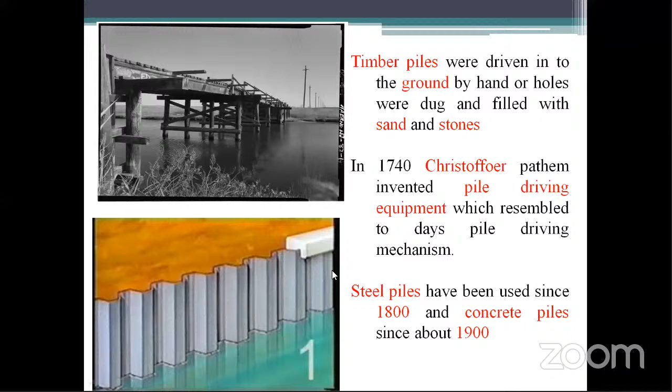In 1740 Christopher Polhem invented this pile driving equipment. It resembles pile driving mechanics, what we call a pile dynamic analyzer. This concept was already developed by Christopher in 1740, and it is like an advanced technique we are using now. And see, in 1800 steel piles were used for retaining water, and concrete piles have been introduced since 1900.

The industrial revolution brought about important changes to the pile driving system through the invention of steam and diesel. That's why you can see a lot of rotary machines. Initially they were using tripod machines. Now, with a lot of research, there are rig machines that enable you to complete projects in stipulated times. I will be showing the detailed specification methodology in the coming slide.

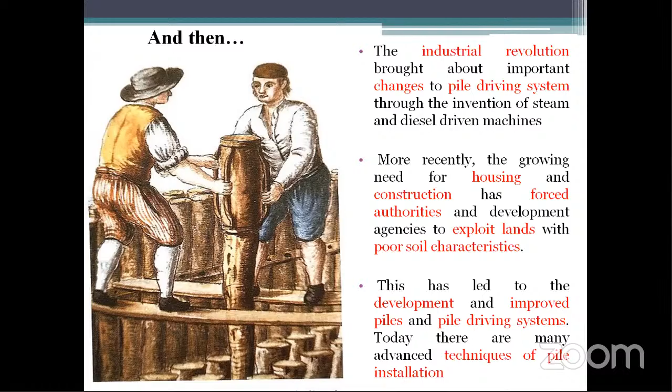See now, what do you mean by pile foundation? If you see a soil mechanics textbook or a structural textbook, they each have a different definition.

The standard definition is: a pile is a structural member made up of steel, concrete, or timber, and it is used to support the structure and transfer the load at the desired depth either by end bearing or skin friction.

You can see the pile shown in blue color. The skin friction resisted by the soil is shown in black, and this is the end bearing. This is an end bearing pile - the load from this residential building is resisted by the rock. If rock is not encountered, the entire load will be taken care of by the soil.

So if the soil is good, you can go for a shallow foundation. If the load is very high, then you have to go for a deep foundation.

Take the Bangalore Metro example - especially at Majestic, rock was encountered at just 15 meters. But when I was working in Lucknow Metro, even till 45 meters we didn't encounter rock. It was completely designed with skin friction. So the total capacity is always designed with skin friction plus end bearing.

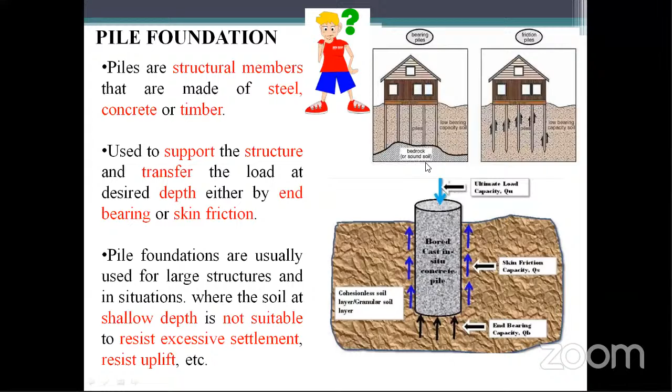When you come to larger diameter piles - especially for big infrastructure projects like metro - larger diameter piles are introduced. For a residential building, 600mm diameter is generally sufficient, or maximum 750mm. But for metro projects, we generally use 1.2 or 1.5 meters, depending on the case.

So in that case, as per IS 2911, the code won't satisfy. We still have a lot of uncertainties and research gaps - especially between whatever we teach in the classroom and whatever we implement in practice, there's a huge difference.

We must understand there is still a lack of knowledge about residual soil. People have not understood what is meant by IGM or bedrock. Just based on the N value, they are terminating the borehole.

But you're designing the pile for skin friction and end bearing. If you are deciding the borehole depth based only on N value without understanding the type of layer - and if you see any boreholes, especially in the current scenario in India, you won't see C and phi values properly documented. They may give an entire 30 meters depth with only one reading of C and phi. In that case, how will you design? So a lot of uncertainty is there.

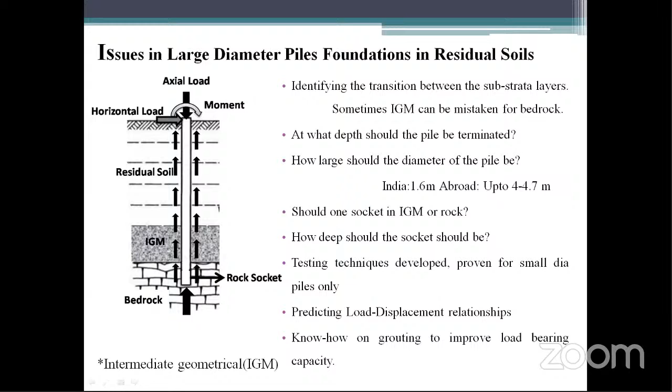Generally the flow chart for any metro project or foundation: first you do field testing based on soil classification. Based on the load, you decide whether to go for a shallow foundation or a deep foundation. Once you decide on deep foundation, currently we only do bored cast-in-situ piles, not precast. Once you decide on bored casting, you design for axial load as well as lateral load.

Once designed, you check this in the field also by the load settlement curve, then prepare the drawing and design, then the work starts. Whatever calculation was done in the office gets back-calculated when the pile is constructed in the field, by conducting a static pile load test or pile dynamic testing. Also by PIT you can check the concrete quantity and quality. Once everything is over, then you give the approval.

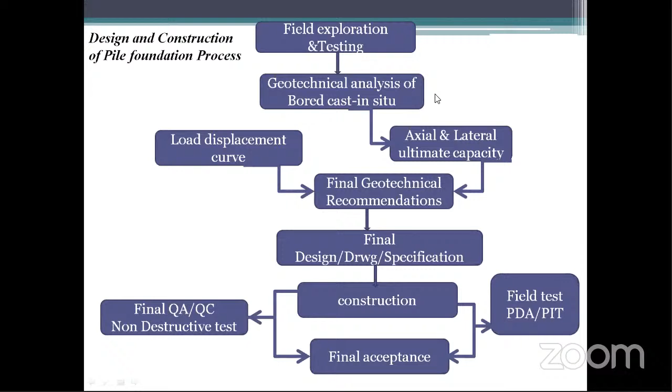Currently in India, 10 Indian cities have a functional metro railway system: Kolkata, Delhi, Chennai, Bangalore, Hyderabad, Jaipur, Gurgaon, Mumbai, Kochi, and Lucknow. This is the current status of metro projects ongoing.

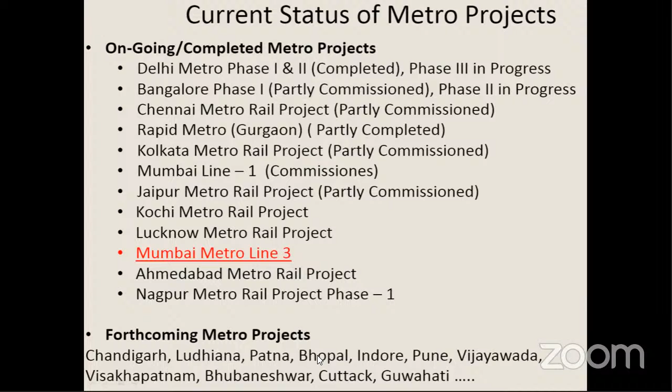The Delhi metro phase 1 and phase 2 are completed, phase 3 is in progress. Bangalore phase 1 is partially commissioned and phase 2 is in progress. Chennai is similar. The forthcoming projects are Chandigarh, Ludhiana, Patna, and Visakhapatnam. I have plotted this, available on Google, showing the upcoming and ongoing projects in India.

Now, to understand the stepwise process: first they conduct a soil investigation, then decide on a pile foundation. After constructing a pile, they do a pile cap, then go for a pedestal, then after the pedestal, a pier.

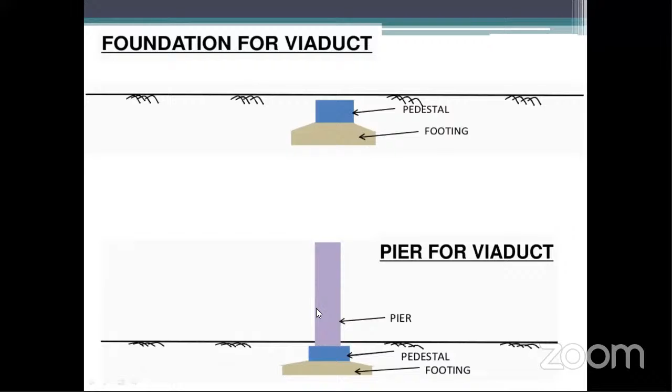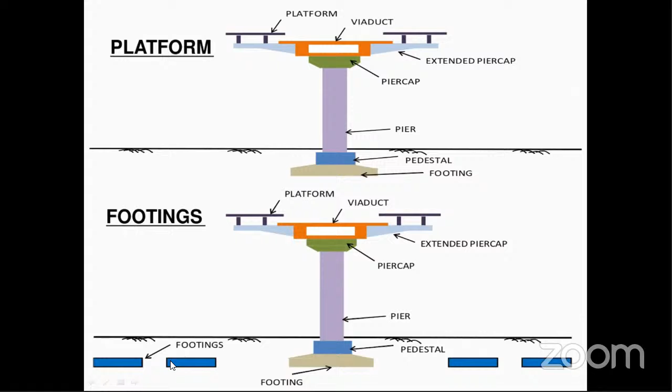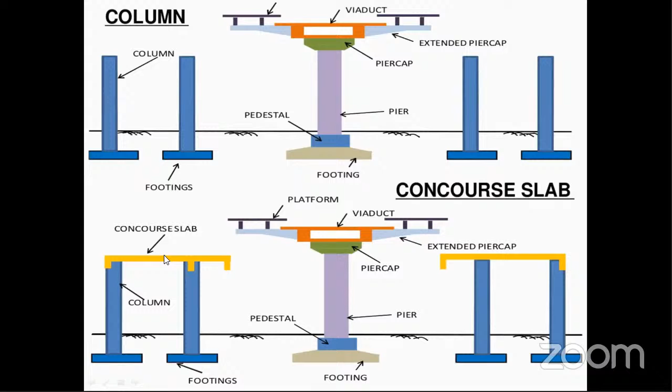After the pier, they construct a pier cap, then the viaduct, then the platform. This includes the extended pier caps, and also supporting footings for columns. Now they construct the station shed, then the concourse slab, then the platform. I told you this is the steel structure, then they cover it with a roof sheet. This is the step-by-step procedure.

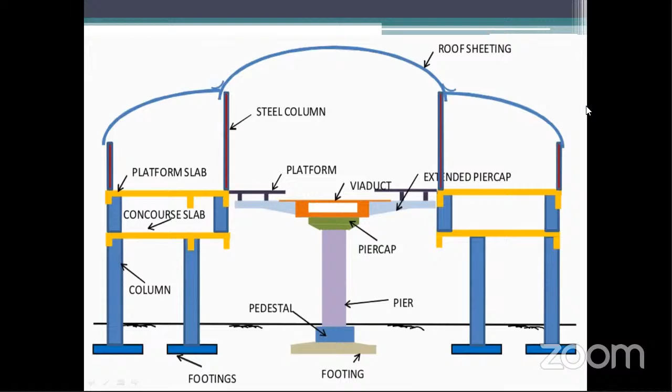Coming to current practice, we generally follow IS 2911 part 1 section 2 for concrete piles and bored cast-in-situ piles, and IS 2911 part 4 for pile load test only. In the Indian scenario we use smaller diameters, maximum 1.6 meters, whereas abroad they use up to 4.7 meters, because we are not financially as strong, so we always use the maximum feasible.

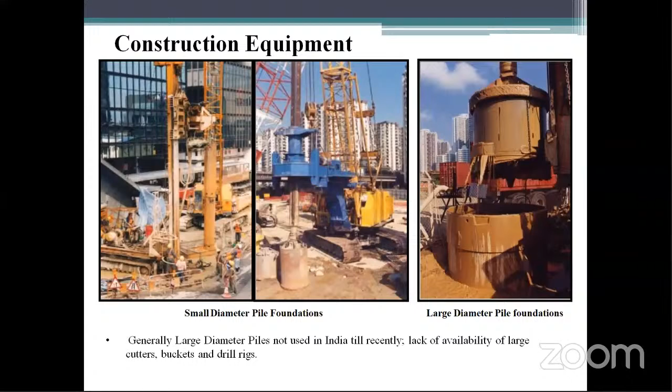With respect to 2010 onwards, we are using bigger equipment like rotary rigs and casing. Initially it was very difficult, always hiring equipment, and construction was difficult. Larger diameters were not used in India until recently because of lack of availability of large cutters, buckets, and drills. In the next slide you will understand different types of cutters, what type of soil each is used for, and their capacity. You can see this is the round shank chisel core barrel.

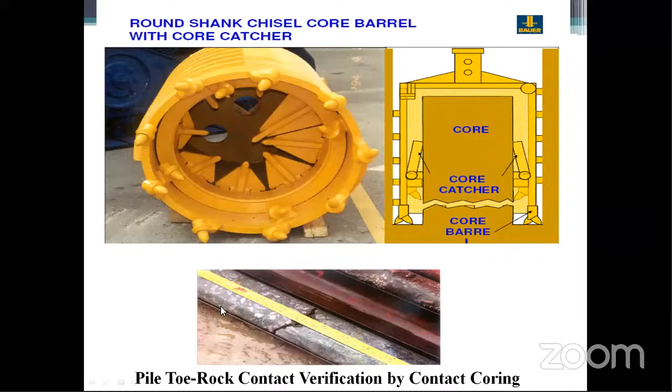This will be used to collect the rock sample. When we are designing the end bearing, this will play a major role. The rock will be cutting, so you can see the teeth. This is the rock sample. This is the core sample.

First, you will be forming a rock socket by cutting the annulus in the rock. First you identify, then you cut, then you break this, then you clean with the bucket, then again you put the air pump to remove the particles. Even a small particle, if it is there, then you can't achieve the end bearing what you are expecting.

So the cleaning of the borewell will always play a major role in pile work. After cleaning, you will be lowering the reinforcement, then you are pouring the concrete by the tremie method.

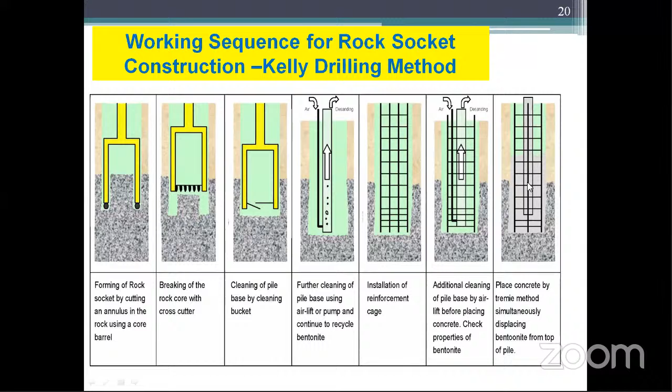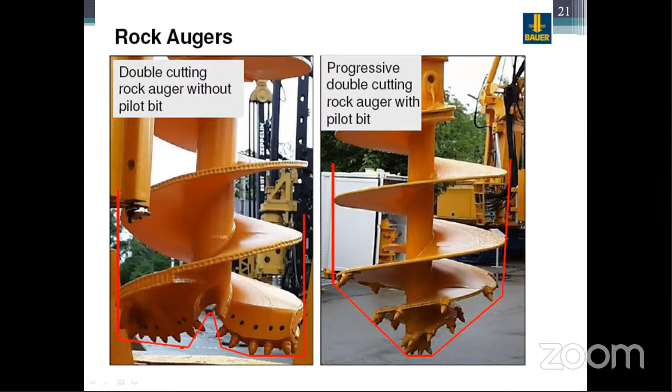You can't recommend as it is. You must have some basic knowledge. Then only your project will be completed successfully in short time.

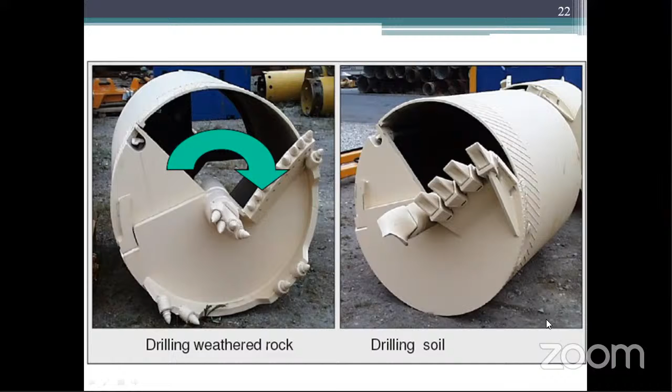Suppose, for example, you may be doing the soil testing for 3,000 or 4,000, but when you encounter rock, it will be 10,000, because hiring this type of drill bit and conducting it is very challenging. So the cost is also very high.

This is one more type, called round shank chisel core barrel. Its capacity, this will be used for weathered rock up to 80 MPa.

This is a roller bit core barrel, and this will be used for hard rock. That's why I told you geotechnical engineer and geology will play a major role in identification of rock, and based on that you will be suggesting the suitable augers. That is also the first step. Without knowing the knowledge of soil or rock, you can't randomly suggest anything.

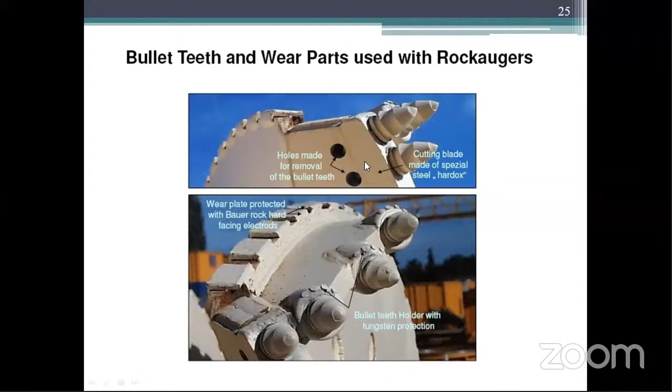So then there is one more, the bullet teeth and wear parts. You can see this, you can remove this and you can do the servicing. You can change this drill bit whenever you require.

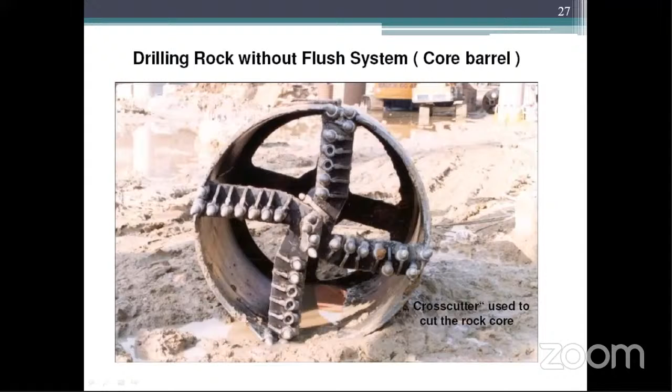This is a single blade cut auger, and this is a drilling auger without flush, with core barrel. This will be used for the rock core. Till now what you understood is for rock only, how to do this related to end bearing.

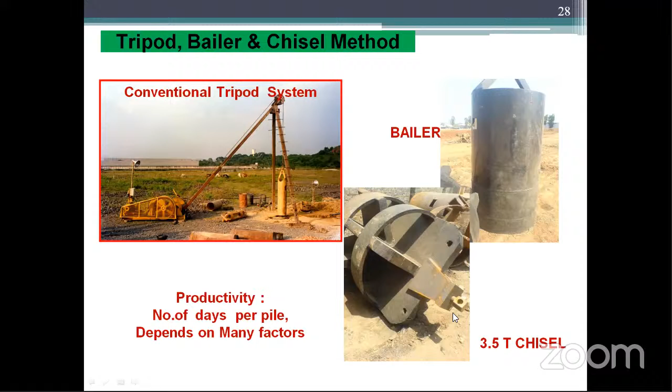Now you will be understanding if you want to construct the pile by the tremmy method. This is called the tripod method. First, you will be erecting this tripod, marking this. This is the chisel of 3.5 tons. This is the bailer for cleaning the borehole.

First, different steps. First, when you mark this, you will chisel it. Then the reinforcement will be constructed, then you are lowering this reinforcement. After lowering this reinforcement, by using the tremmy method you are constructing, you are pouring the concrete.

If the pile is successful, then the overflow of concrete will happen. Suppose if the pile's borehole has collapsed, then this type of overflow won't happen. This is also one of the rule of thumb. You will identify whether your pile is really constructed well.

Suppose if you constructed a 6-meter pile and you are estimating the concrete quantity, that much quantity of concrete should take place, and also the overflow should happen if the borehole is not collapsed. Suppose if the borehole is collapsed internally, when you are boring it may look good, but when you are lowering or when you are doing concreting, sometimes the borehole will collapse.

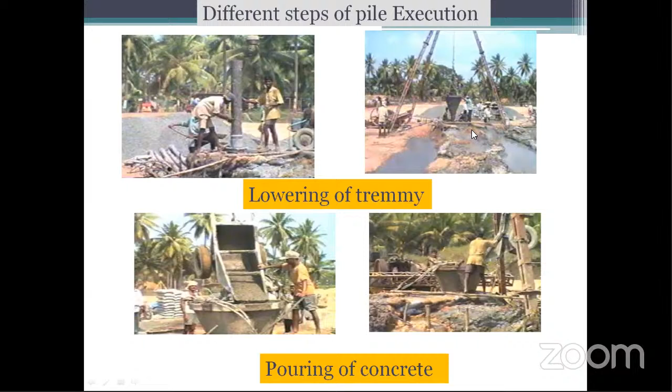So you should take care. You should not wait till 28 days after curing. So this is also a rule of thumb. Nowhere in the textbook will it tell you this. This all comes from practical experience.

After doing that, you will be chipping that pile and you will be conducting the pile load test by this. This is the hydraulic gauge.

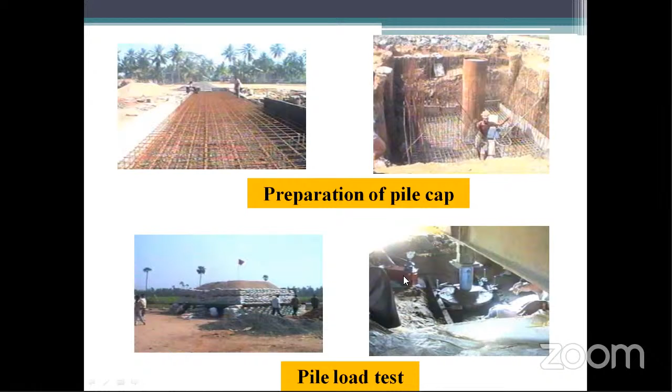You are putting the dial gauges. This is the pump. You're transferring the load and you will be calculating. When you are going for a manual method like a tripod, what are the limitations? It's very slow and sometimes it is indefinite.

And always you should have an experienced person. A fresher can't handle it. That's why in any project they will mention this many years of experience should be there. Lots of uncertainties will be there, and at every 1.5 meter you have to collect the sample and you should understand it. Based on that, you have to take the decision immediately and go to the next level by drilling. So a fresher can't do this. You need a lot of experience.

Next, very high quality supervision is required. Always at the back end, not only the site engineer, even a geotechnical person should be there. He should always verify whether the type of soil or rock we are expecting is what we got or not. Otherwise, we can't terminate the borehole. And the actual rock in which the pile socket is assessed by an indirect method, by energy. Even by tripod, just dropping the hammer based on the sound, you can't predict exactly.

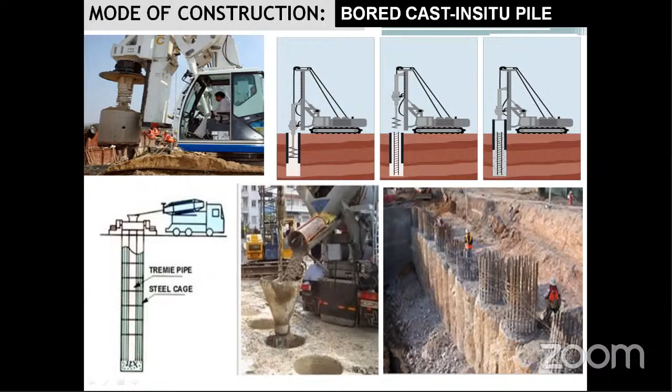So a lot of uncertainties are there, but here the cost is high. Initially it was not used, but nowadays this machine is used in every project, even residential, but the cost is high. Work-wise it is very accurate compared to the tripod method. Initially they drill, and if the soil is collapsing, they put a casing, then they lower the reinforcement, then they clean, then they do the tremie method. After curing they will be chipping. It will look like that. If you want, you can put the capping beam also. Then they will conduct the pile load test.

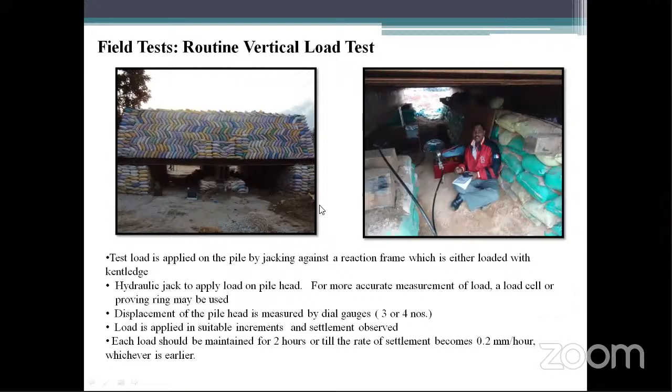The pile load test will be conducted by a hydraulic jack. They apply the load at equal intervals, and the settlement will be measured by the dial gauge. See, the load settlement, just roughly I'm showing you. This is the load settlement curve. It will always come like this. Once you get the load settlement curve, you have various methods to calculate: single tangent method, 12 mm, double tangent method, and 10% of dia.

IS 2911 Part 4 always says you should match the two criteria, that is 12 mm and 10% of dia. Suppose this is a 1 meter dia pile used for a metro foundation. 10% of dia will be 100 mm. Generating 100 mm settlement is impossible. And also getting 12 mm is very, very difficult. You require a huge load.

That's why I told you this concept is very good for smaller diameters, but not for larger diameters. So this is one way: whatever you design using the IS code method or the Meyerhof method, you can back calculate from the practical results. This is the curve obtained from the field. You can verify it by these four methods.

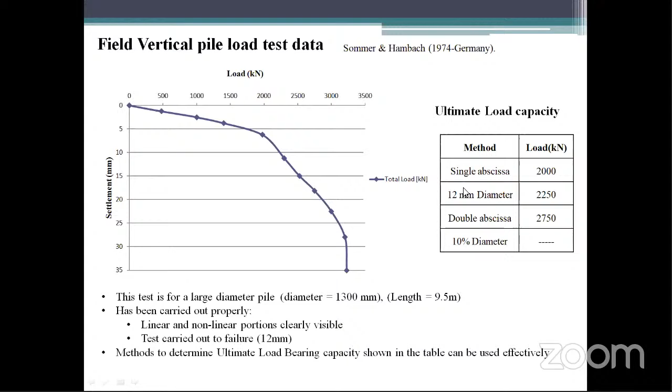And also in case you are not getting a proper static curve or some other thing. Nowadays very few people are using the static pile load test because of the preparation of sandbags. It will take a long time, so they go for an immediate test called a dynamic load test. In that, there is an advantage: from the dynamic test you can also obtain the static load test. So this is the thing.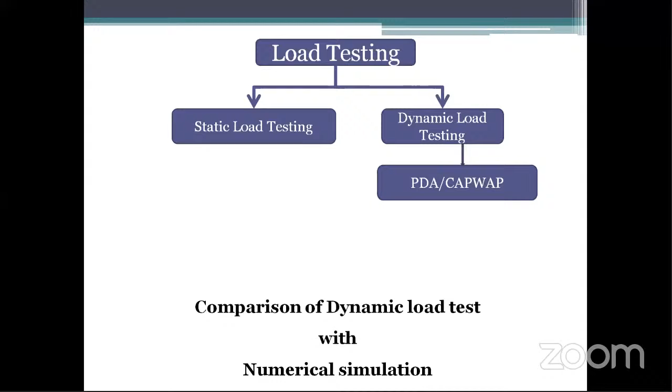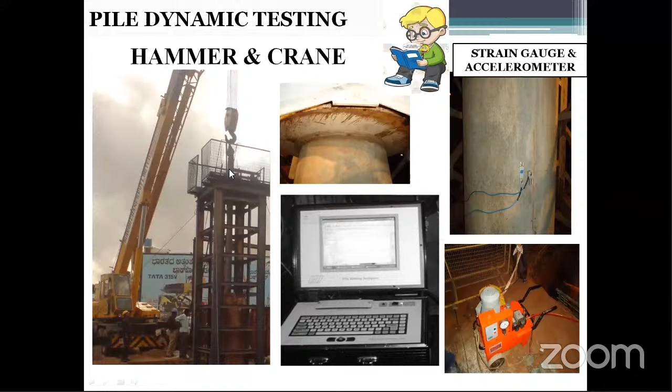They are just fixing this hammer. This is the cushion head. They are making a temporary head on the pile. Then they will put the cushions. Then they install the sensors, strain gauge and accelerometer. This is the PDA equipment. This is the pressure gauge. They will drop the hammer 3 times and they will calculate from that.

See what happens in the mechanism. Because in India we don't have a dynamic code, we always follow ASTM D4945 only. When the hammer hits the pile, what will happen? The compression wave will travel from top to bottom. The force and particle velocity will be measured, force from the strain signals using the pile area as well as modulus.

Then the velocity is calculated by integrating the measured acceleration. Then the force and velocity time history is captured by this PDA equipment. That's why you can see these waves, how they are. This is captured by the PDA equipment. Once you capture it, you will get a static curve like this.

See, the advantage of this test is this. The static test takes a long time; creating a platform will take a minimum of 1 week to 10 days. This will be very spontaneous. Another benefit is you will be calculating the capacity of the pile, and additionally pile integrity, pile stress and hammer performance. These 3 will tell whether the pile is defective. If you have any problem like honeycombing, it can be easily verified. But in a static pile load test, you can't do all this.

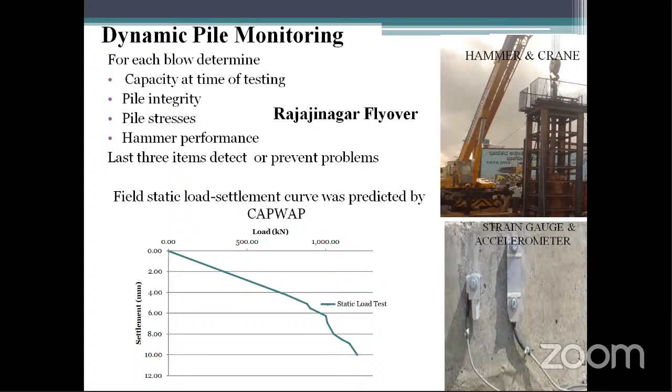So nowadays everyone is going for the dynamic test, because in one test you get all the results. And if you are a researcher with good software knowledge, you can model this using CAPWAP and back calculate the total skin friction, end bearing as well as the total curve. That will give you more confidence as a designer.

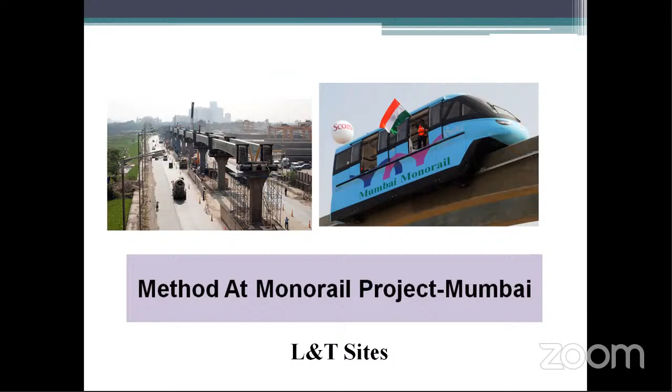Now I will go a little fast through the metro rail, the general procedure to follow. I have taken a case study of L&T's Mumbai Monorail. They have taken 2 pile diameters, 1000 mm and 800 mm. When they designed, they got a maximum capacity of 300 to 550 tons, and as per their bore log, they encountered rock like basalt, with UCS of about 45 to 200 MPa.

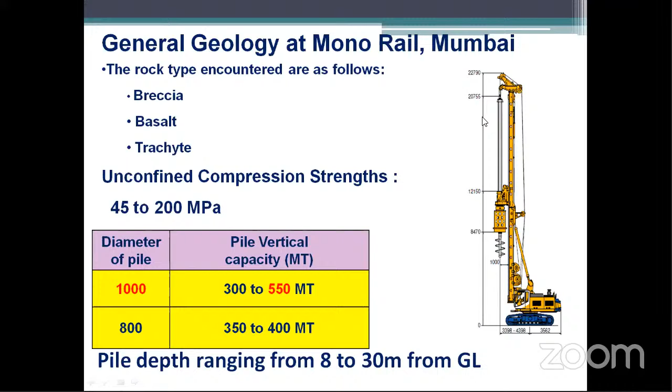And the pile depth, as I told you, the soil is undulating, it won't be uniform. It may be from 8 meters, and in some places the maximum depth they went was 30 meters. In Bangalore we encountered rock at 15 meters, but in Lucknow, even at 30, 45, 50 meters, no rock. So this will depend.

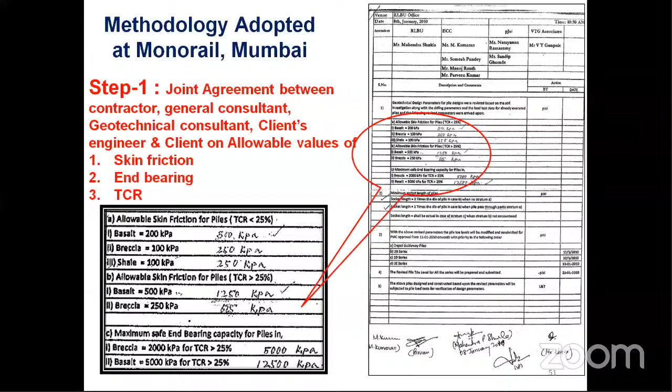Generally in metro there will always be a joint agreement between the contractor, consultant, geotechnical consultant and client on the allowable values. They will give instructions on skin friction, end bearing and total core recovery, and it should be well documented. Then they collect samples at regular intervals and send them for testing. You can see how nicely they have maintained the date, pile, depth, timings, everything.

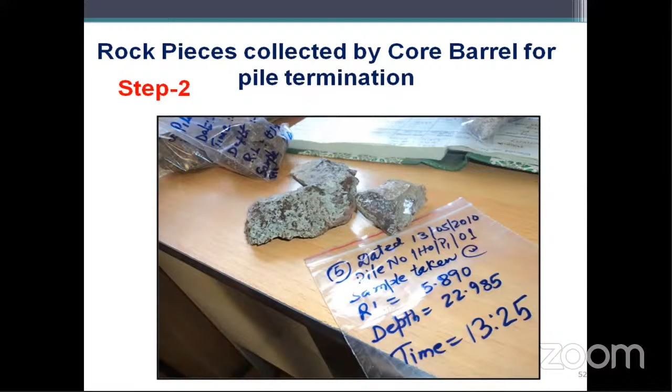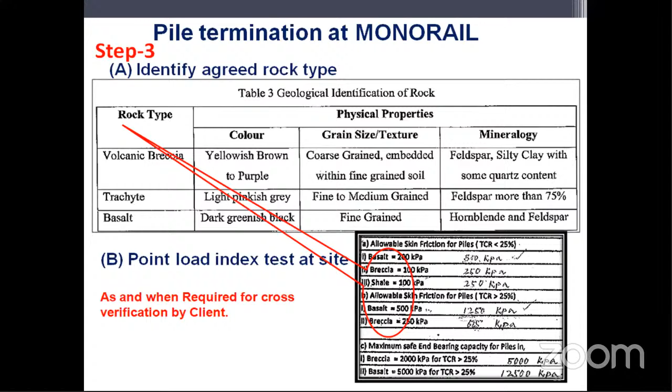That's why when you are noting down, you must have at least basic knowledge of soil as well as rock. After reaching rock, you should make sure of the diameter. This is the core barrel for core sampling. With a suitable auger, you cut the sample and collect it, and the core sample is taken by the rotary piling rig. When terminating the pile in rock, you must have good knowledge, and it should be verified by a point load test.

Then based on rock type and total core recovery, you calculate the skin friction and end bearing by a suitable formula, and you take a factor of safety. Generally in metro or deep foundations, we never go for 2. We always take more than 2: 2.2, 2.5 or 3.

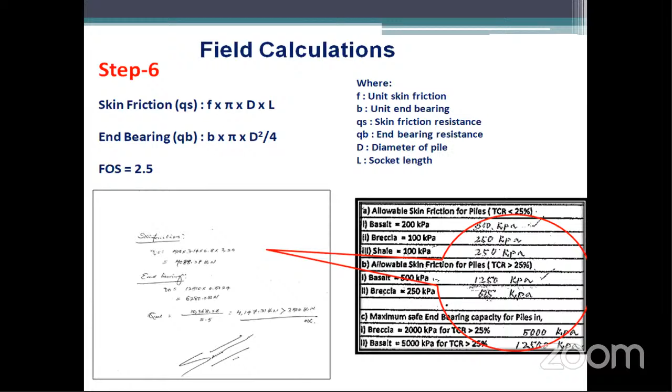Then this calculation will be sent to the client. Once the client is satisfied, he will give the approval. Then you have to terminate the pile. This is the procedure followed in the metro.

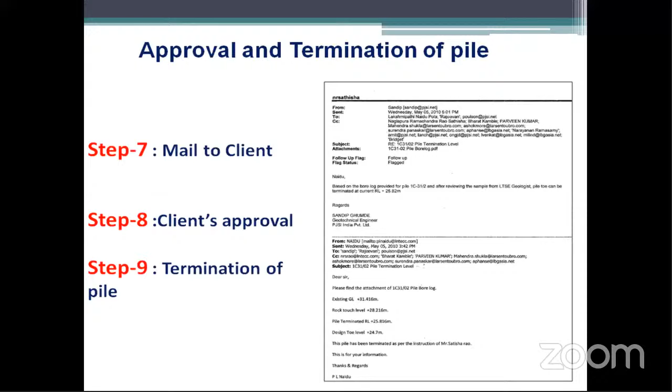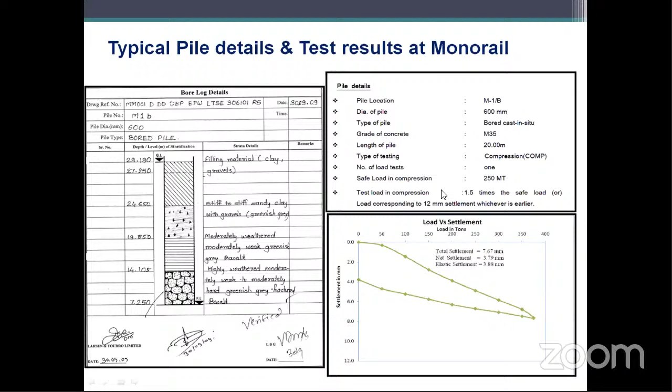Now I will be telling you about the underground section. This is phase 2 of Delhi. The contract value is about 813.5 crores. In that they have constructed 4 underground stations plus tunnel. This is also a joint venture by DMRC, Delhi Metro, and CEC.

CEC is sharing a 70% share, and Soma, a 70-30 combination. Always this metro will be done with this joint venture only. The mobilization period they have given is 12 weeks. The construction period was 162 weeks, and the defect liability is 12 months. And the internal retention recovery to keep is 10%.

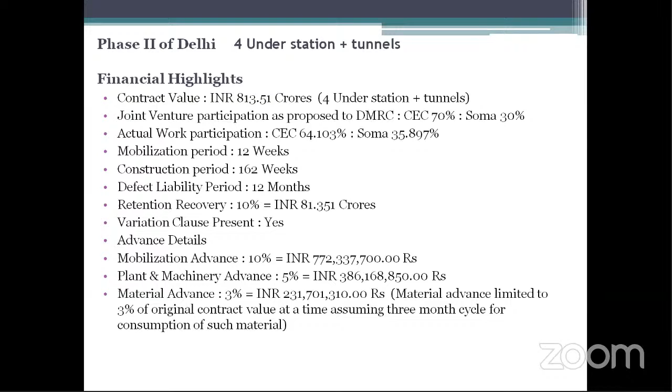See, they have constructed these 4 metro stations: Jorbagh station, INA station, Racecourse and AIIMS station. The length is about 318, the width is about 20 meters, and the depth is about 18 meters. The length will be the same here, but here the depth is a little bit less.

See, when you are suggesting underground metro, the advantages are that the underground metro electrification system has fewer components, and also the operation and maintenance cost of underground metro is very less compared to elevated, because it is unaffected by external weather conditions, because it is always below ground, so you don't need much maintenance.

But the initial cost is too high in underground compared to elevated. That is the only drawback. Also, relief from traffic congestion can be achieved due to underground metro. The architectural quality and aesthetic view of a particular city can be maintained by the underground metro.

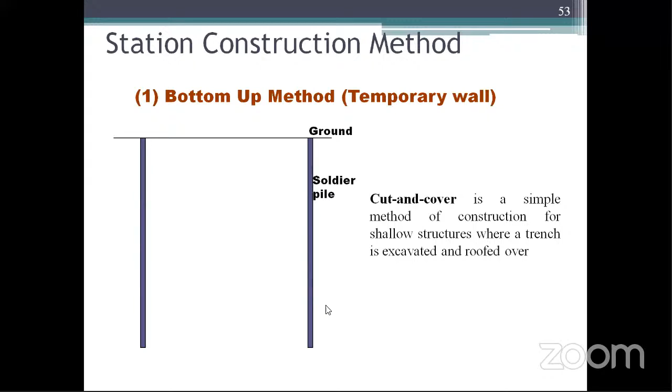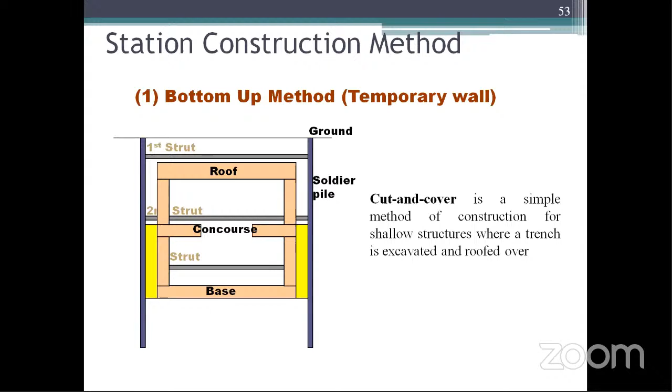See, when you are constructing, there are 2 types: top-down construction or bottom-up construction. First we will be constructing bottom-up. You will be going to the required depth. First you will be retaining the soil by soldier piles till the required depth. Then you will be constructing strut 1, then strut 2, then strut 3. Then you will be constructing the base, then the concourse, then the roof slab.

See, this is the construction procedure of the soldier pile. First you will be marking the location. You will be doing the borehole by the rotary rig method, and if soil is collapsing, you will always put the casing at maybe 1 meter to 3 meters, and drilling will be continued. Suppose you want to drill to 12 meters, you have to do 12 meters as per the designer. Once the design depth is reached, clean the borehole using the cleaning bucket.

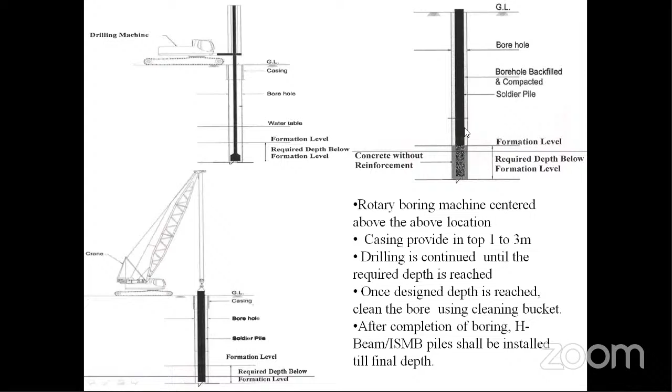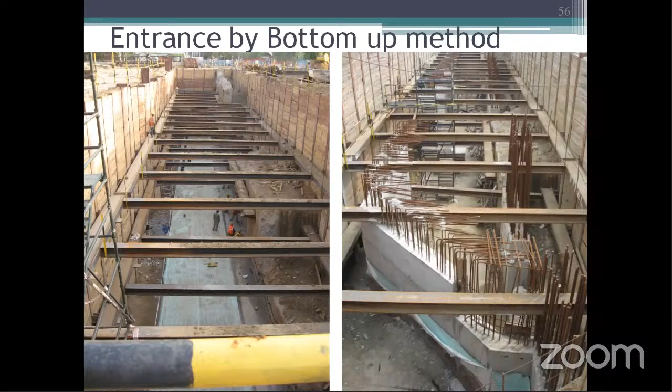After completion of the boring, the H-beam or ISMB shall be installed. After your work, you can remove this. See, this is the soldier pile and this is the strut. You can see this is the entrance by the bottom-up method. Similar work we have done at Chinnaswamy Stadium in Bangalore Metro also. This is in Delhi Metro.

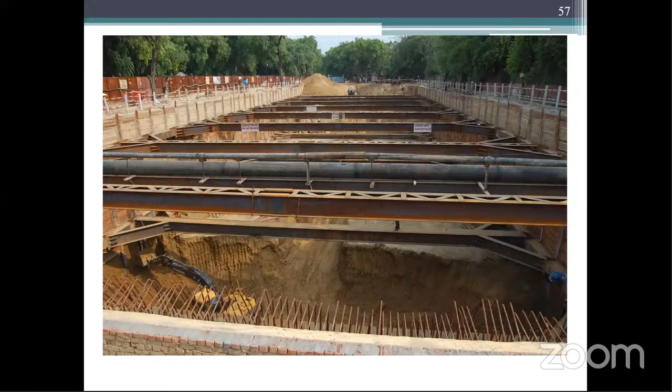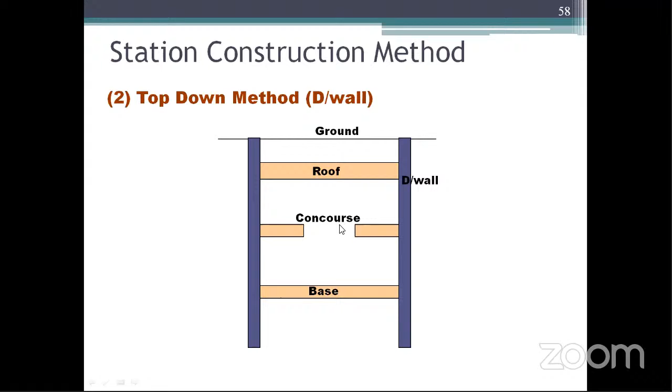Next is top-down construction. See, this is a top-down construction. First, in top-down construction, we always construct the retaining by diaphragm wall only. Once the diaphragm wall is constructed, you will be excavating, then you will be putting the roof. Then again, your equipment will go. You are putting the slab. Then again, you will make a concourse slab. Then again, you are making your closing base here.

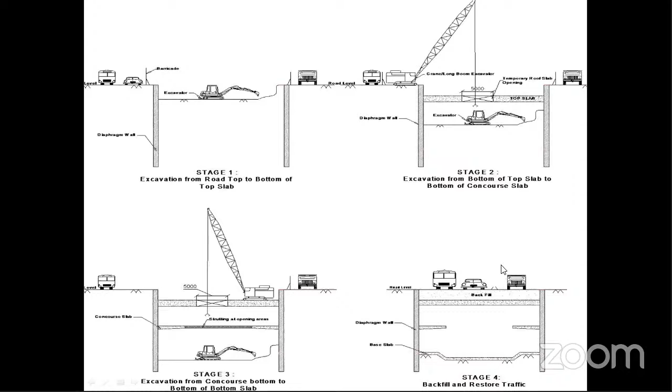See, this is the thing. Stage 1, you are excavating from the road top to the slab. Then, going from top slab to bottom slab, you are putting the slab here. Your vehicle will be transferred here. Similarly, in stage 3, your vehicle will be going at this level. Then you are putting the strut here for the opening. This will be going from top to bottom, but meantime, the vehicles will be traveling on top. The same concept. So you can see the excavation from the road, top to bottom of the slab.

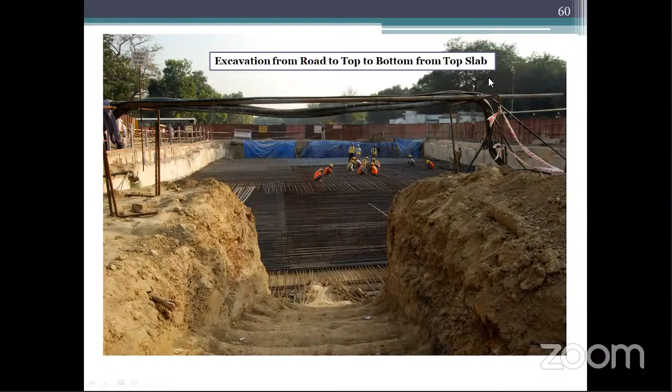See, then this is the construction of top slab. So after curing it looks like this. This is excavation from the bottom of top slab to bottom of concourse slab. This is the station construction they are doing.

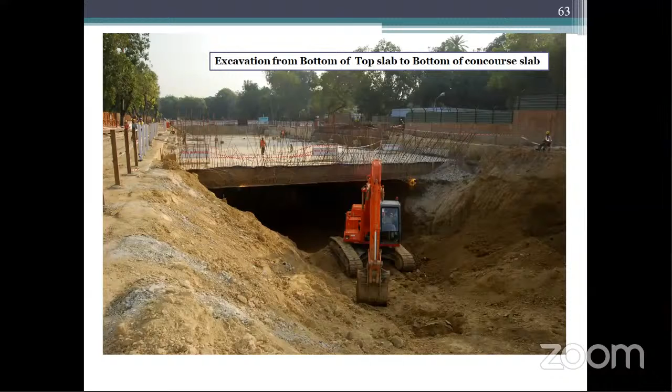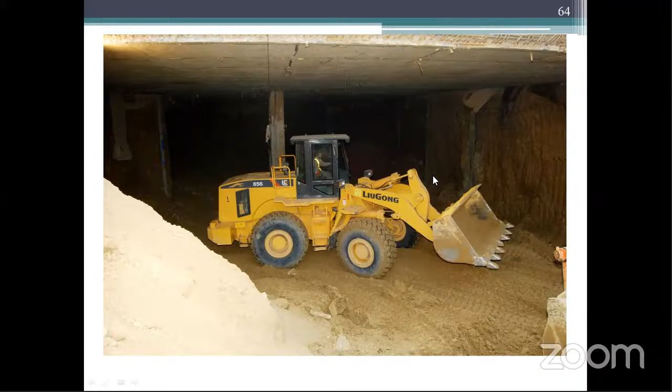You can see the stage wise. Suppose if it is basement 3, this is basement 2. This will keep on going.

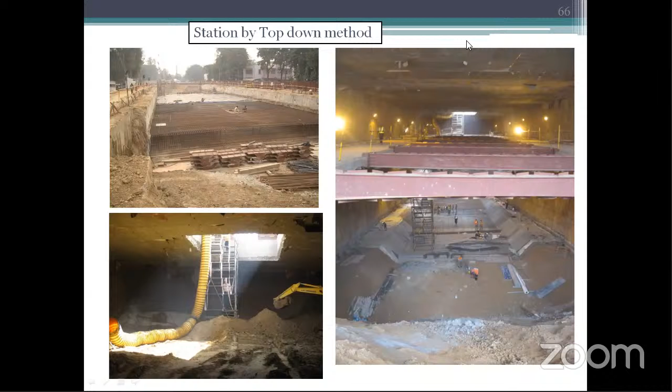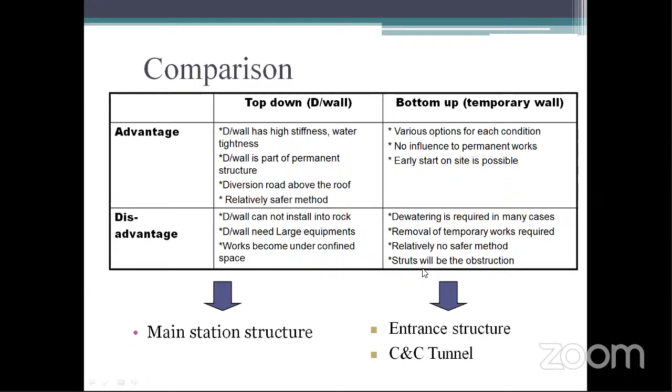This is also one more burden for the civil engineers in rainy season when you are constructing by using a bottom up method. The removal of temporary work is a relatively less safe method, and struts will be the obstruction.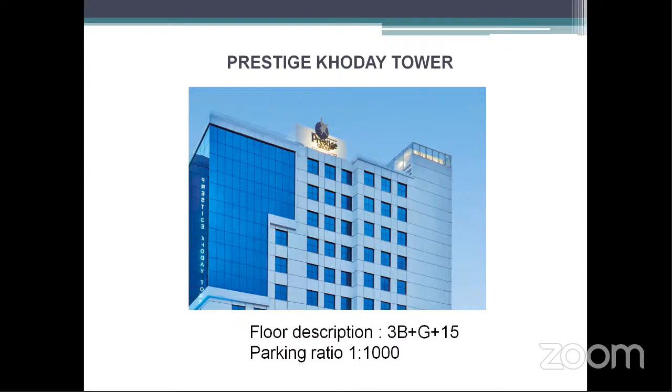Now, the same technique we used in 2010 for Prestige Khoday near Raj Bhavan. From United Foundation, I was the design engineer for that. The floor description is 3 basements, 1 ground plus 15 floors. In Bangalore presently, we have a trend of constructing multi-story commercial or residential buildings. And because of the limited space, almost all multi-story buildings will have a basement for car parking and service rooms, up to 2 basements.

That means about 6 to 7 meters, and the side support for the excavation depth may be designed economically, like a touch pile or a diaphragm wall. In this case of Prestige Khoday, we have 3 basements, 1 ground level and 15 floors. It involved a maximum excavation depth of 12 meters. And at 3 to 5 meters we have a water table also. Next to this, we have a petrol pump. So we have a limited boundary. So keeping this in mind, we suggested top-down construction.

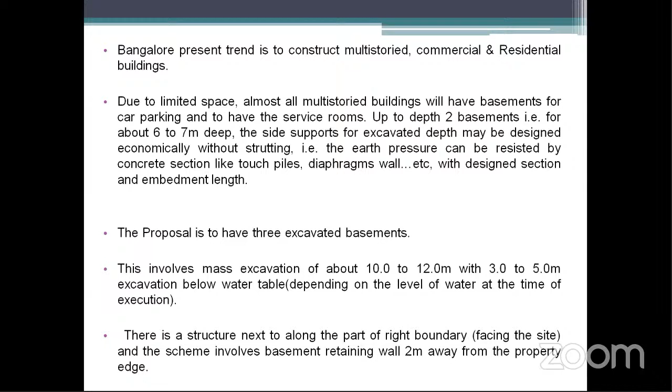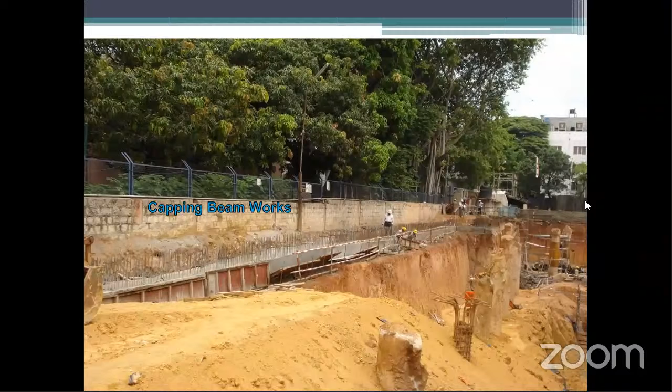First we constructed a touch pile with this Hitachi machine, of 600 mm dia, to retain the soil. You can see after constructing, they are putting the capping beam. This is the All India Radio station. This is the thing you can see.

Then these are the structural load bearing piles, 32 structural load piles of 750 mm dia. This is the casing of 25 mm. This is MS steel casing at 3 intervals, because there were 3 basements. When you excavate, this level should be completely matching. You can see these are the load bearing piles. See, when you excavate, this will be exposed, and your steel bar will be welded.

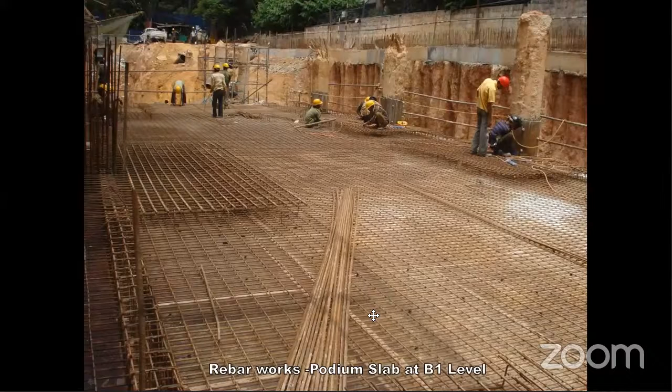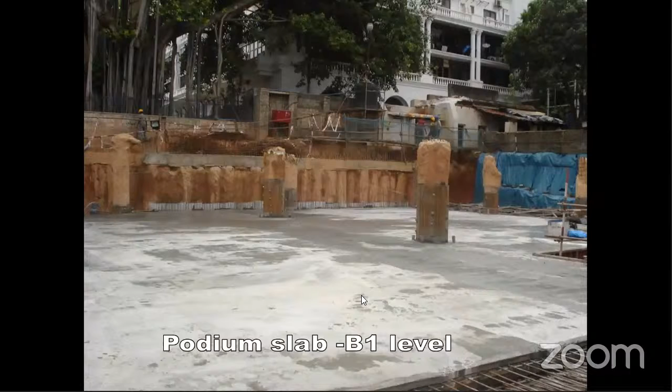Then this is the podium slab of basement. Then you will be putting the reinforcement. Then you are making the concrete. It looks like this. This is basement 1, top-down construction. Then you are going to elevation. This is the elevation of west side.

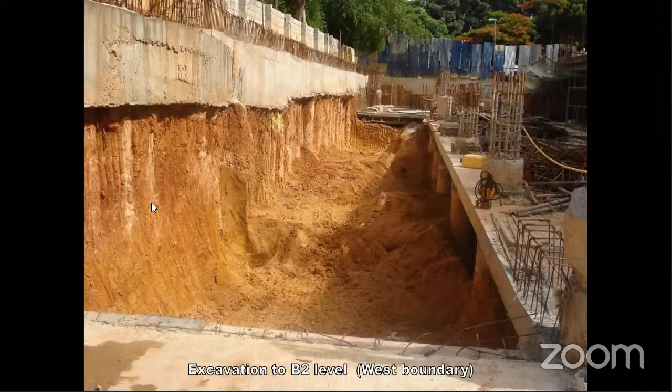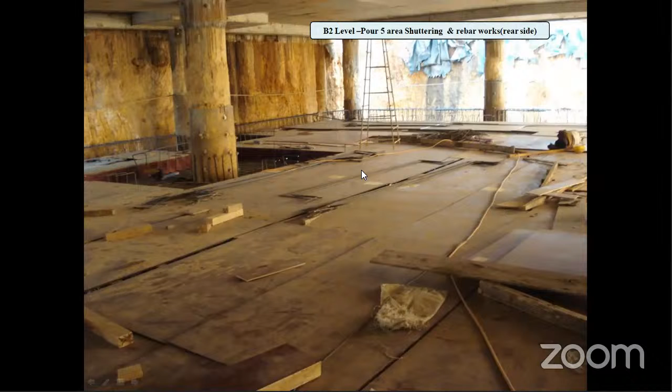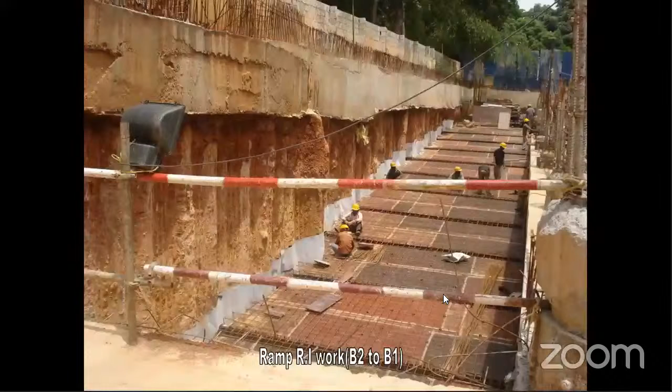See, generally we use bentonite for retaining the soil when drilling the borehole. Instead of bentonite, if you replace it with a polymer, what advantages can we see? This project they used in Malaysia.

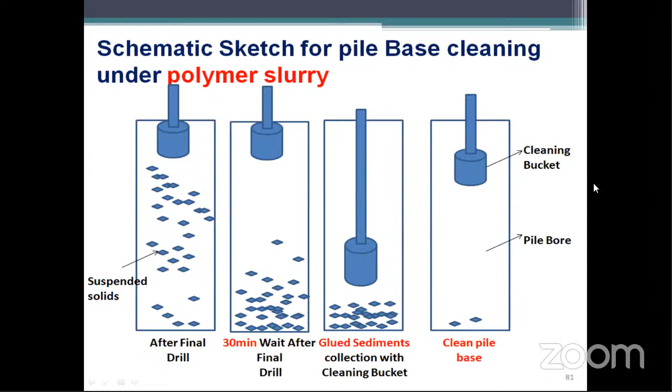See, initially you will be drilling the borehole and you are putting that polymer for 30 minutes. It will act like a glue. Whatever particles are there, they will stick and come out. So you will achieve the end bearing and skin friction exactly. You can see this is the clean sample.

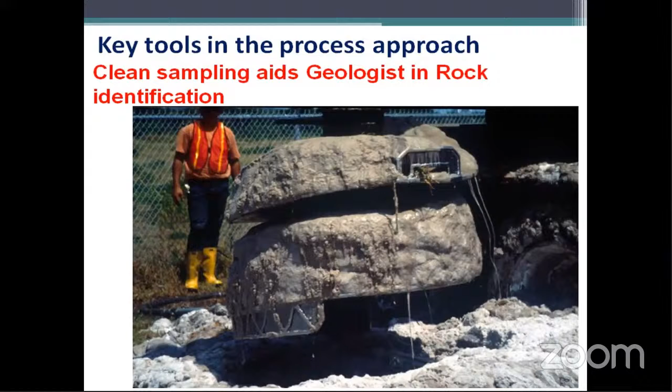In bentonite, you won't get this. Whenever you are drilling, the borehole will be collapsing. Whenever you clean, still some particles will be there, muck will be there. But when you are using this polymer, you will get a 100% clean borehole. So if you are comparing bentonite to polymer, time for hydration is required, but polymer can be directly used.

The flushing time of 120 minutes is required for bentonite. Here, for the polymer, only 30 minutes is sufficient, and with bentonite the base cleaning is not 100% sure. That's why I told you, whenever you are cleaning, still some muck will be falling down. But this acts as a glue. Whatever is there, it will stick and come out cleanly. And the end bearing you are predicting, you can't achieve, but in this method, you can achieve.

And bentonite cake formation will reduce the skin friction, I told you. But here you will get 100% sure. And bentonite wastage through slush will be more; here it is very minimal. And also the productivity is relatively lower, but here it is higher. When you want to use bentonite, you have to make the pit, storage, everything. It requires a huge setup. Here it is not required.

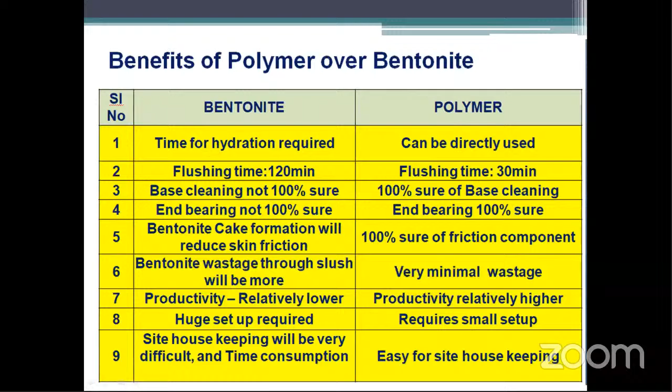It's a small setup. And also you have to maintain a site office to keep the bentonite bags safely. But this is easy for site housekeeping. Whenever you want, you bring it, use it, and just go. No need to make a shed and keep it.

Also ensure core recovery in the rock and keep the core box at the pile location. Keep the sample at every 1.5 meters, do proper testing, prepare the core log and select samples for UCS and point load tests, and have a geologist at the site for better identification and classification of rock. Design the rock socket and specify the termination criteria. Consult the equipment manufacturer for the right equipment, tools and guidelines.

These two will play a major role in any project. If you are not able to take care, definitely the cost and time of the project will be more. So always interact and discuss with the concerned person, take the right call, and procure quality accessories and tools. The client, consultant and contractor should always have a team approach, and adopt concrete coring, contact coring, sonic logging. These are all non-destructive tests to check the concrete quality.